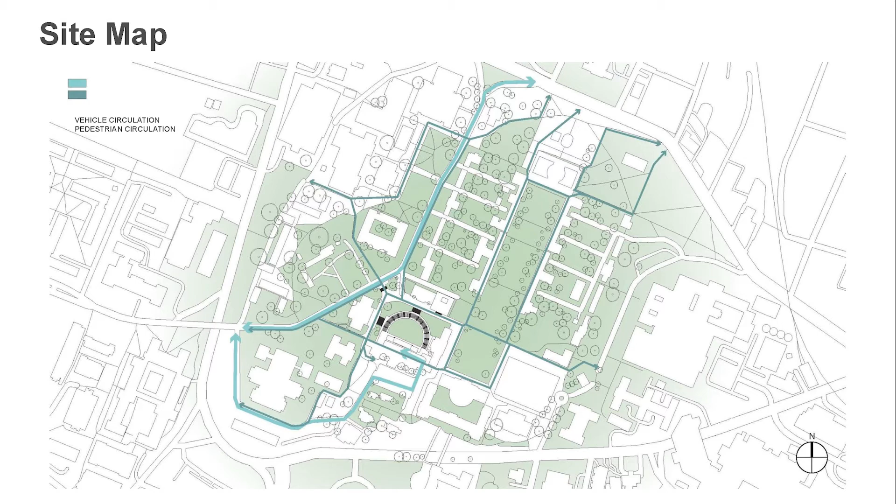This site map shows McIntyre Amphitheater's location in UVA's central grounds. It's located southwest of the lawn and in close proximity to many key pedestrian routes, as well as university bus lines and vehicle traffic along McCormick Road.

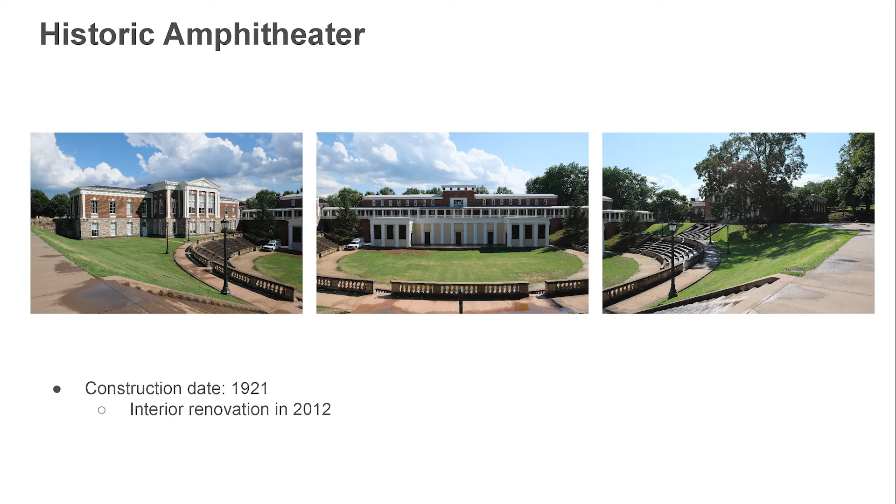The historic existing structure was designed by architect Fiske Kimball and built in 1921. In the center image, you can see the neoclassical structure with two small buildings attached by a back wall forming a skene. There is existing concrete seating that's separated from the stage by a wide grass area. The structure was renovated in 2012, converting one of those side buildings into offices and a break room for the UVA facilities team.

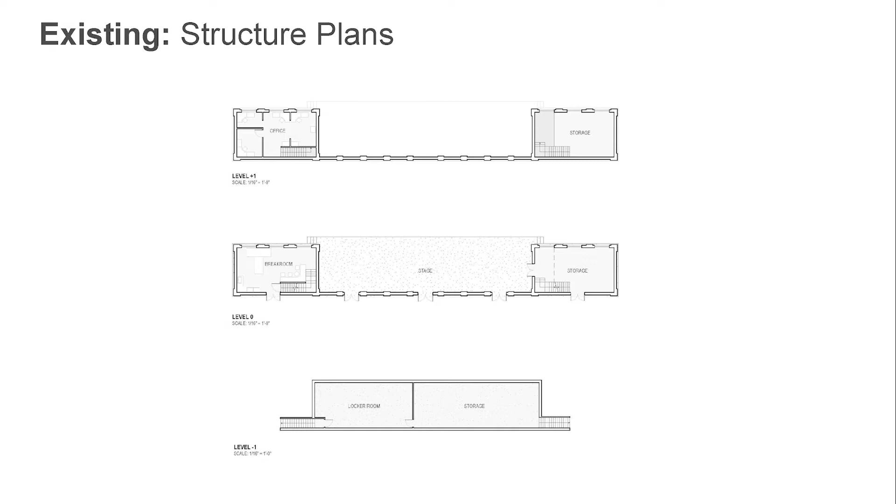We assessed other existing performance spaces on grounds, including the Culbreth and Caplin theaters, which are home to UVA's drama department. These spaces are used for more official performances and are usually only accessible to more established student groups. Most student performing groups are left with the Student Activities Building, which is a drab, generic multi-use space, as their only option. Furthermore, none of these performance spaces are located near central grounds.

This leads us into the key challenges we identified with the site. The existing stage is very wide and shallow, and the current seating is far away from the stage, which has created very poor sight lines for large portions of the seating. Additionally, the site access and circulation is funneled through a few stairs, and so the area is not handicap accessible.

The site is used for different informal gatherings throughout the day, including lunches and activities fairs, and we decided that our proposed renovation should allow those informal functions to continue while also providing all the technical infrastructure that's currently lacking that would be required for any type of night event or full production, including positions for rigging and other equipment, backstage areas, loading docks, and stage access points.

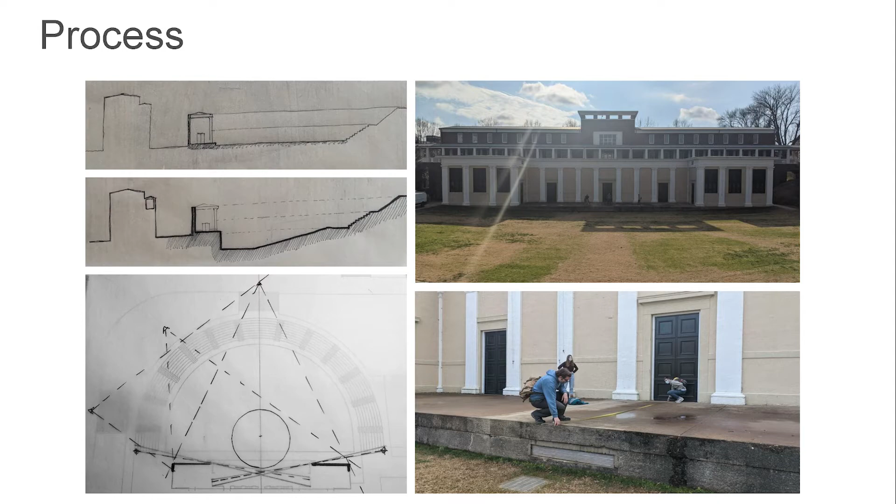We began with diagrams analyzing sightlines and the datums in the existing structure, in plan and section. The pictures at right from a site visit give an indication of the scale of the venue.

This diagramming, in varying levels of detail, allowed us to really begin to consider solutions to the problems in the site.

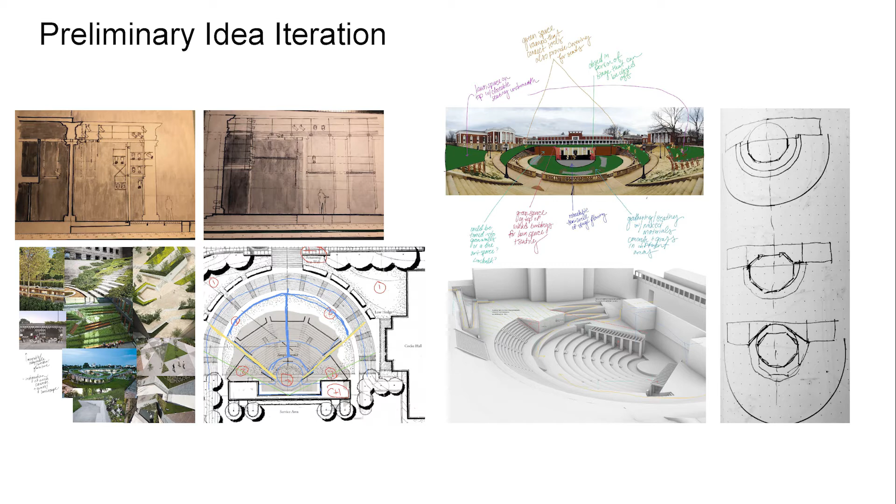This work led us to a series of operations. First, we began with the existing site, looking at the current seating bank as well as the existing stage and structure.

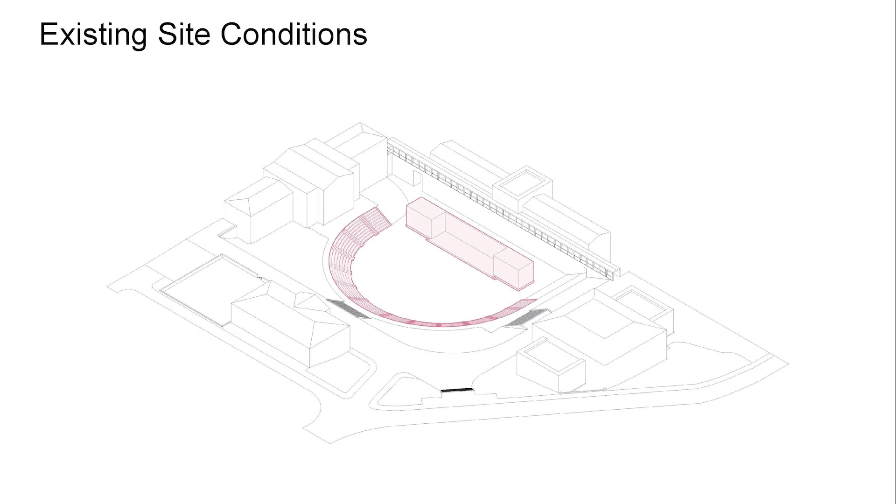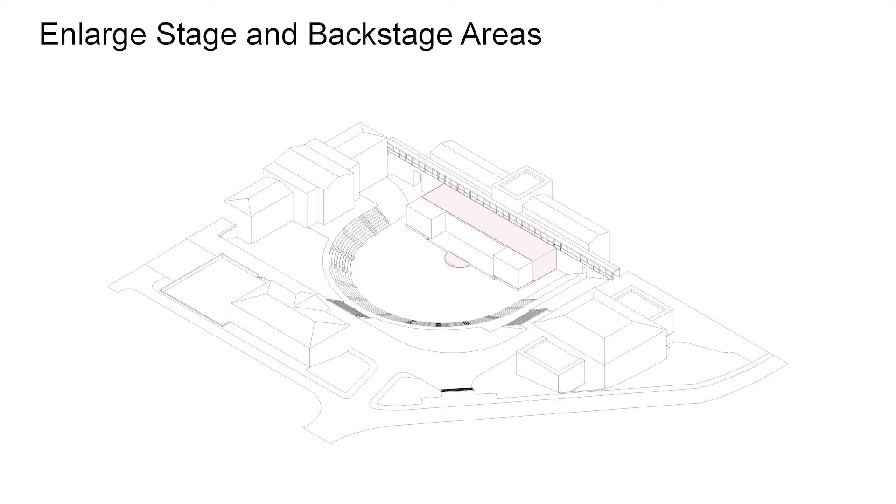Next, we extended the back of the building into a support structure while pushing an apron out from the stage to build it closer towards the audience and give greater depth.

Next, we narrowed the sightlines from nearly 180 degrees to 90 degrees, reducing the obstructions of the building and creating a more unified audience relationship with the stage, which reduced the plaster line in width from 86 feet to 40 feet.

The distance from the existing seats prompted the addition of closer, more intimate seating by excavating terraced platforms. That excavation provided materials to build out the unusable hill at the northeast into additional terraces.

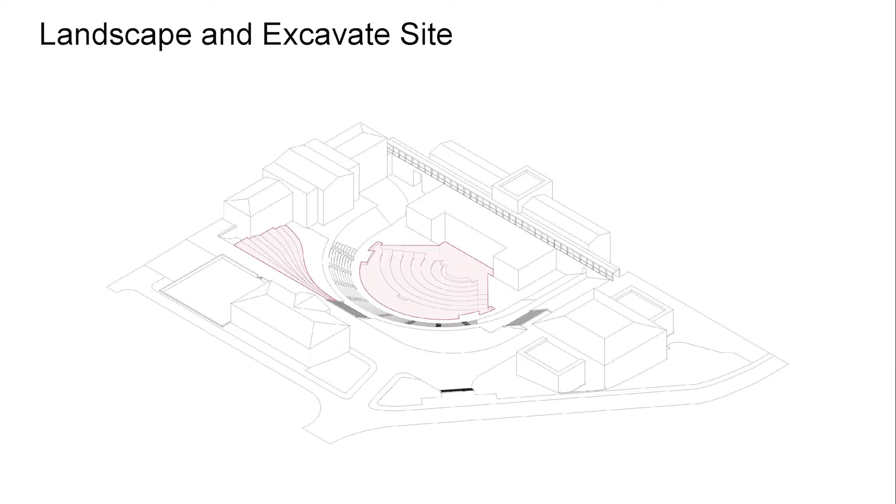The terrain required the addition of ramps, stairs, and railings to make the site accessible from the upper areas as well as between layers. Lastly, over the new seating and stage, additional performance infrastructure is added onto the site, including a large roof containing the overstage rigging, as well as catwalks reaching out into a pergola, lifting speakers, lighting equipment, and rigging over the audience.

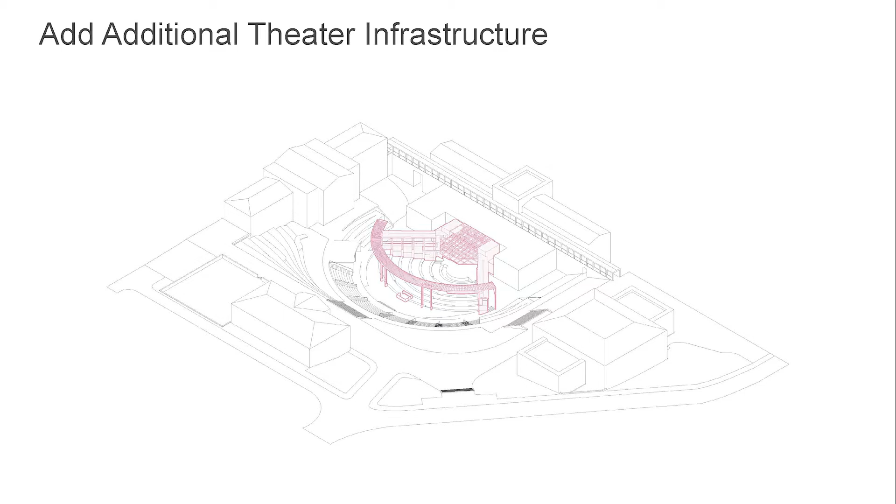When considering the proposal of an outdoor theater, we decided it was necessary to analyze the movement of sun and the presence of shadows on the stage and audience. It was important to understand how the space can be used throughout the year and even within a single day.

Our proposed building works with the sun path and allows for audience and stage to be shaded during daytime performances, giving a more comfortable audience experience.

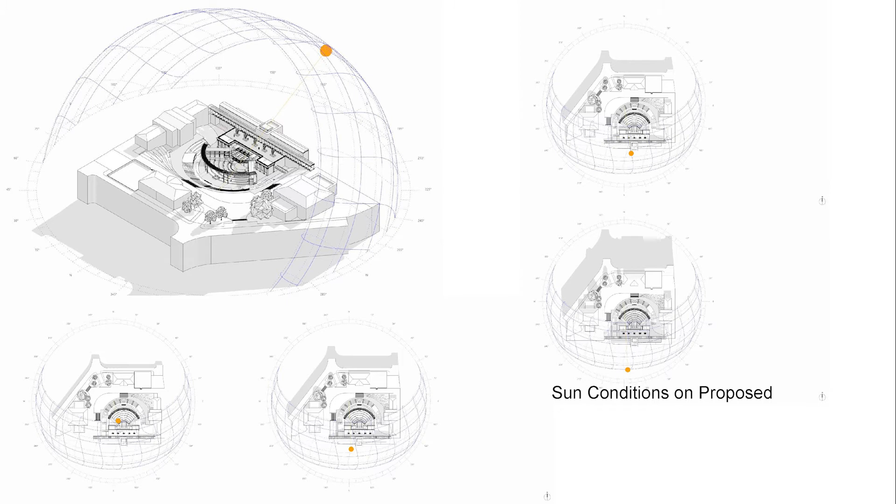The proposed addition to the existing structure provides a new infrastructure essential for a performance space. Both principal and ensemble dressing rooms can host a range of performers and different scales of performances.

A scene shop within this building, as well as a freight elevator, allow for the fabrication of set pieces for students using this space. The ground floor houses the prop and costume shops.

These spaces can double as classrooms for a number of courses offered at the university. Ample amounts of storage were included in the plan to sustain many student-based performances, and an enclosed control booth in the front of house gives stage managers and board operators a space to call shows.

The upper level provides much-needed rehearsal spaces for student performance groups. These spaces are flexible, with partition walls to allow for smaller rehearsals or open to the full size of the stage space. Lighting storage and demo rooms are included to provide practical storage and teaching spaces.

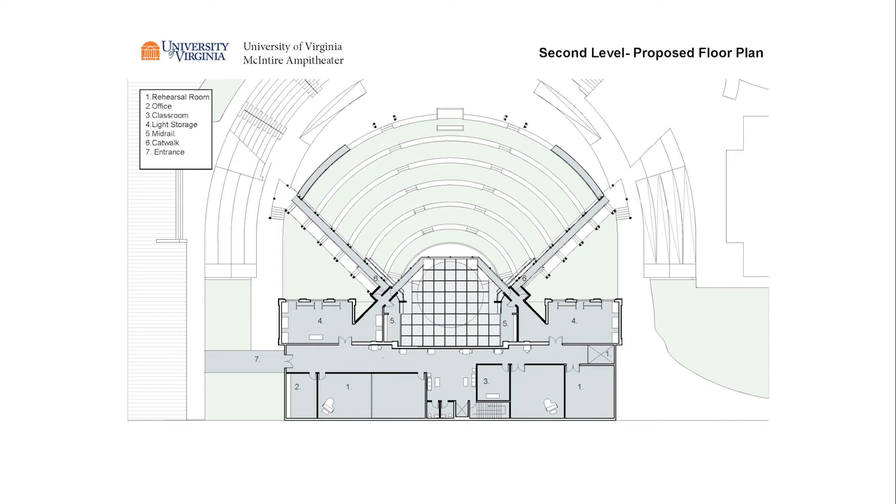The intentions with this renovation was not only to provide space for student performers, but also to the university as a whole. The addition of a rooftop terrace provides outdoor gathering space that can be used during any normal day.

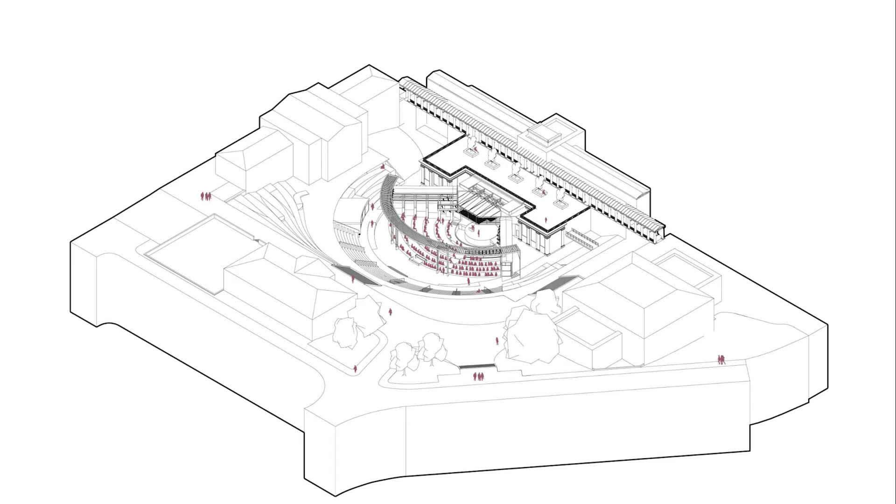We imagine this space taking on many different audience sizes and occupancy numbers based on the type of show and time of day. When no performances are happening, the amphitheater becomes a public meeting space for students and faculty.

Smaller scale shows fill up the lower portion of the audience seating, while larger scale shows have the space and seating count to expand to the upper rows of the amphitheater.

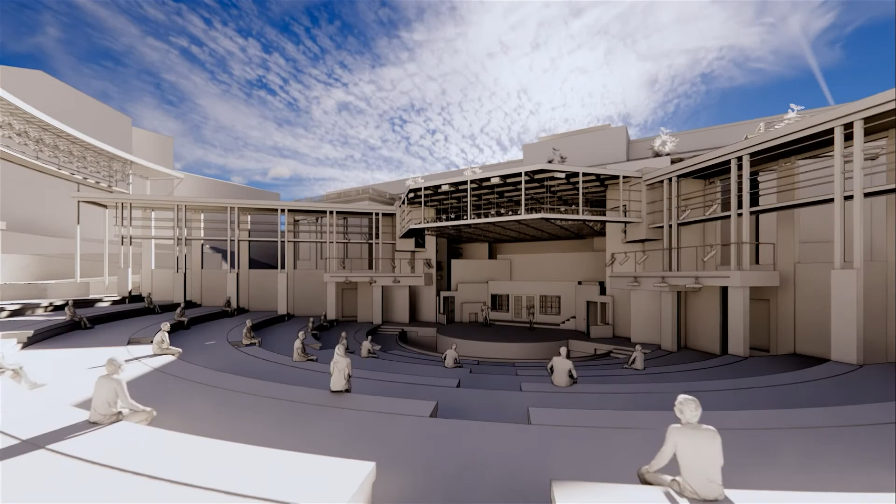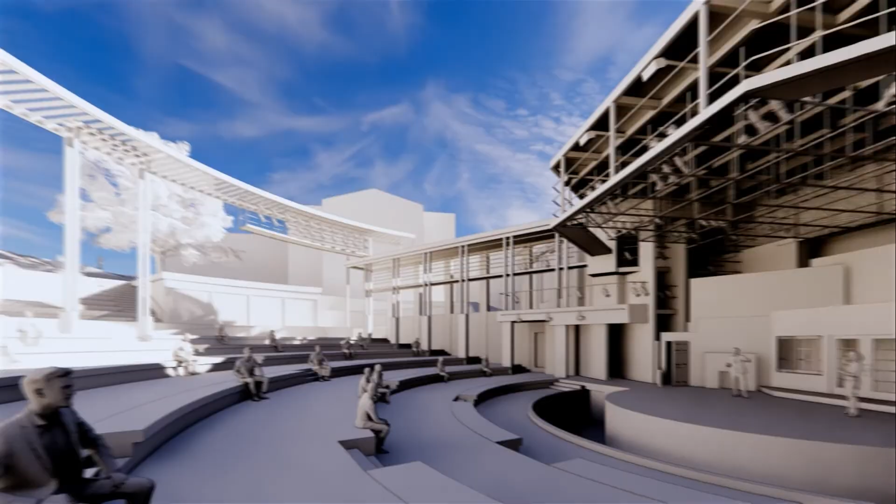Clear and accessible circulation paths are essential in allowing both event spectators and everyday commuters to move easily throughout the site. In the proposed design, the strategic addition of various stairs and ramps facilitates movement between four distinct levels, allowing visitors to easily maneuver from the upper walkway to the lawn seating below.

In creating these new circulation routes, the walkways will be expanded to make room for additional public plazas that can be used for showtime amenities such as additional seating, ticketing booths, or food stands.

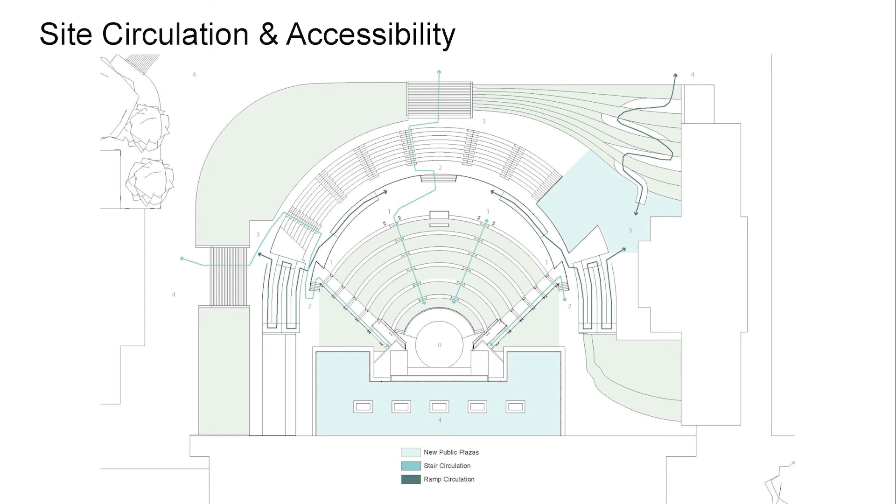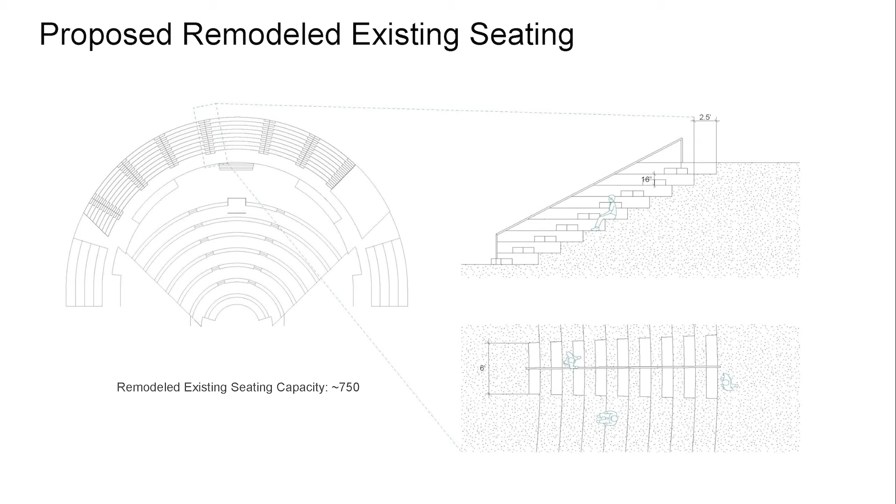The proposed design of the existing seating removes roughly half of the original seating, the majority of which had obstructed views of the stage, in favor of narrowed sightlines and widened staircases. Narrowing the sightline ensures better viewing angles for the audience members, while widening the staircase allows for the addition of a railing, making the space more accessible.

The proposed design of the new seating area excavates the existing inner lawn in order to provide additional seating with unobstructed views closer to the stage.

The resulting terraces are large enough for small groups to gather in a social setting during the day and provide space for informal seating during small theatrical productions.

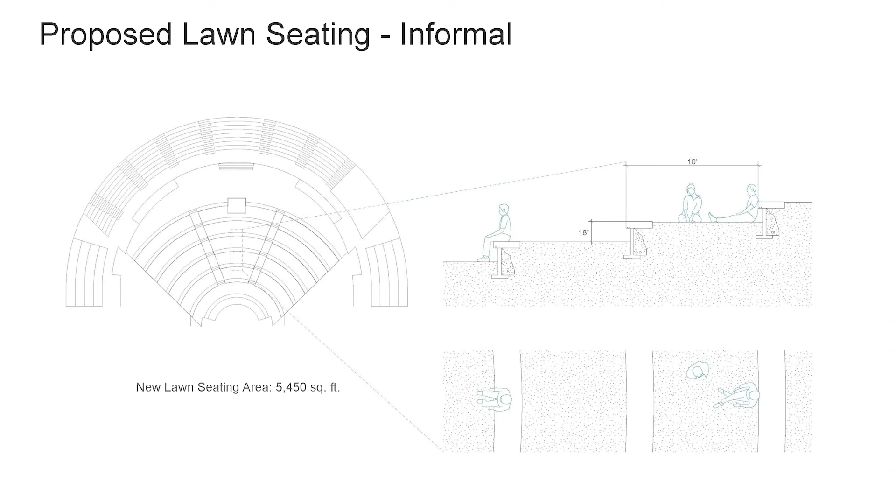This new seating area also provides a flexible space for more formal seating arrangements. By staggering the seats in two rows on each terrace, the seating capacity of the area is around 500. This arrangement allows for more formal productions or graduation ceremonies that require more regulated seating for larger gatherings.

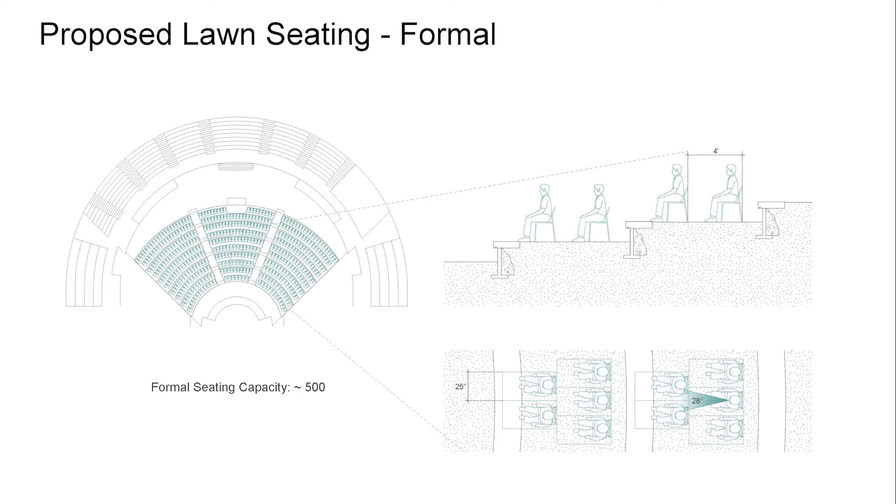The proposed infrastructure is designed to support the technical demands of large plays and musicals, dance and music groups, while remaining accessible to student designers and technicians of a range of experiences, and manage the conditions of an outdoor venue.

This section shows the audience sightlines to the stage, as well as the overhead infrastructure, which, while substantial, is lifted out of sightline and does not exceed the site scale because of the excavation.

A roof allows some protection from rain and snow onto the stage, though most everything is exposed to humidity, wind, and temperature. Side lighting positions reach downstage to provide side lighting angles onto the apron.

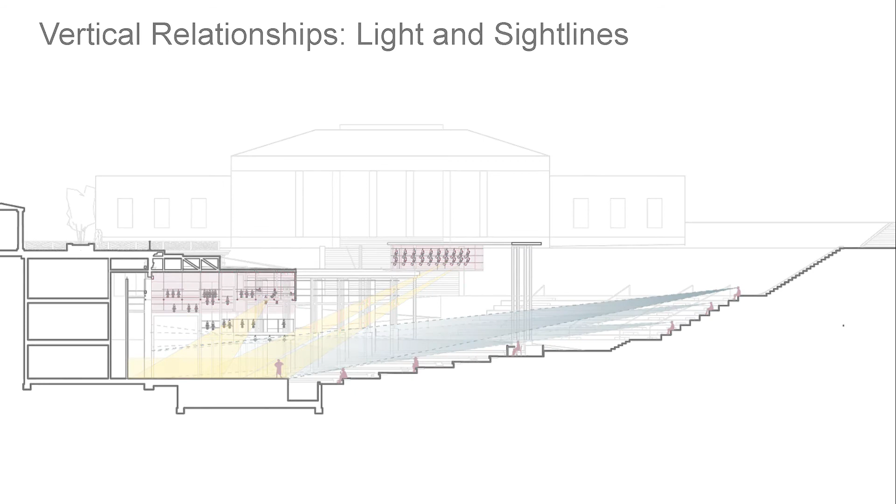The wings in the upstage crossover are tall enough to facilitate moving even tall scenery from the shop to the stage. Horizontal sightlines show the front of house infrastructure kept where possible near the walls, allowing full view of the principal playing area.

Seating excavation allowed for better engagement with the apron of the stage and a radialization without creating a true thrust, to allow for better wing access.

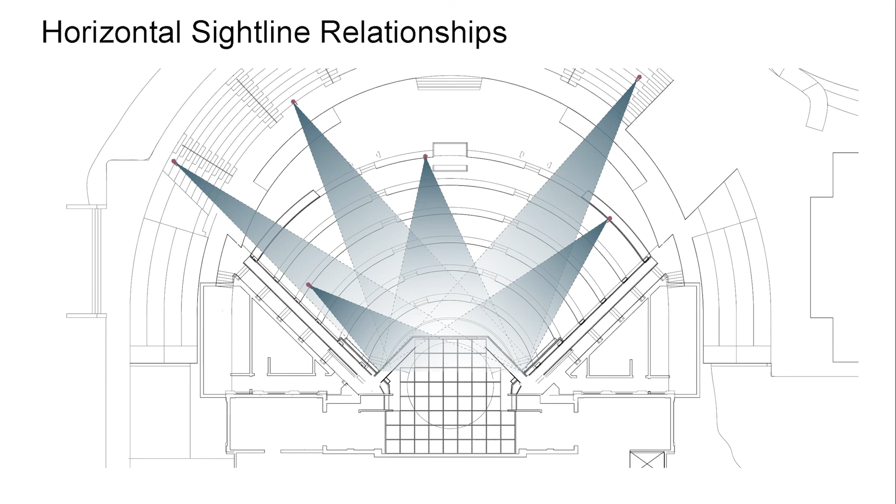This configuration provides amateur performers and directors the ability to play to the audience not through a proscenium window, but without the relative complexity of a true thrust. This also helps solve structural challenges by keeping the cantilever of the overhead roof to a manageable degree.

All overhead stage positions are accessible via either tension grid or catwalk. This is to give amateur technicians easier access without lifts or ladders, while also providing a degree of security by keeping the access from within the building itself, not externally.

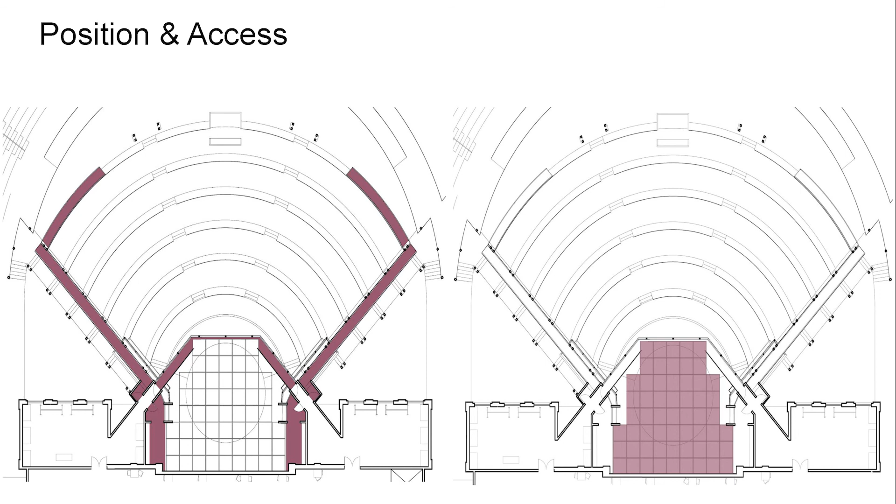At left, speakers are able to be positioned along the overhead catwalk and onto the pergola. At right, power and data systems are proposed. Dimmer, constant current power, and RJ45 jacks are scattered throughout in boxes for moisture protection and flexible access.

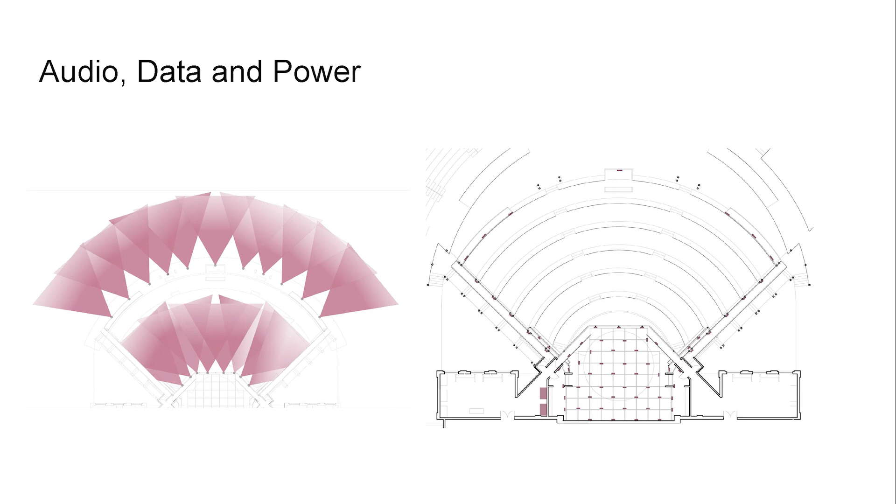The company switch and dimmer racks are located in the main building. Gateways provide universes where needed and feed back into the booth via network.

This light plot shows an example repertory configuration. Positions are flexible to suit the needs of individual productions, designer preference, and varying equipment choices. The venue would need a repertory inventory, however, as student groups typically do not possess their own equipment.

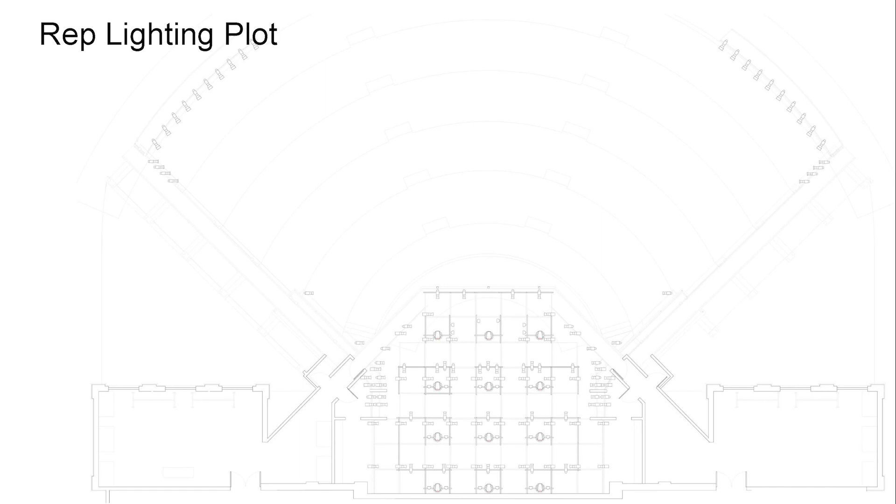Backstage circulation is an important factor in making a show run smoothly. The proposed backstage space situates all dressing rooms and the scene shop with direct access to the wings and stage. The entrances to these spaces are placed on a corridor that reduces the amount of light and sound bleed that can negatively affect a performance.

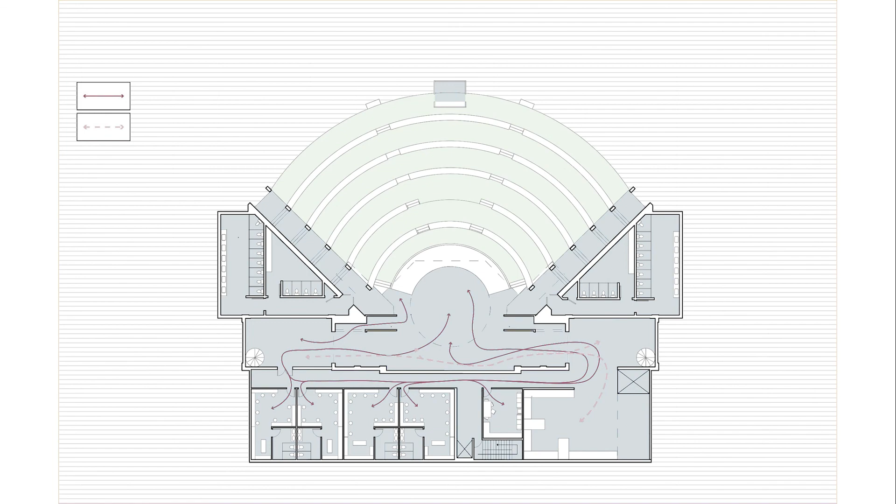A seven-foot wide crossover hallway allows for the quick movement of actors from the stage to dressing rooms and back in place for the next scene.